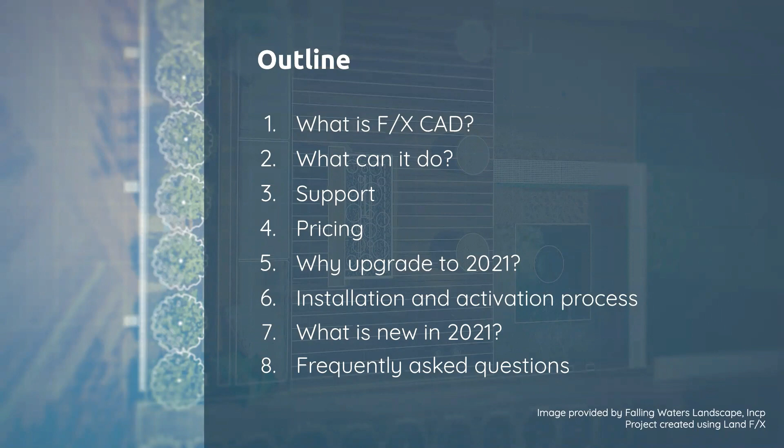So first off, what is FXCAD? FXCAD is AutoCAD. It is AutoCAD that is sold and supported by us. The purpose of FXCAD is to provide a platform for LandFX to run on without having to buy or subscribe to the full version of AutoCAD. So FXCAD does require that you have a LandFX license to run. But even though it's called FXCAD, it is a genuine AutoCAD engine that we are licensed to use.

Also, the engine is a perpetual license, which means you don't have to pay a subscription fee to keep working in it. Once you buy your version of FXCAD, that is yours to keep. It's important to note that it's a PC-only product, so if you work on Macs, you'll need to run Parallels or another virtual machine to have Windows running as well.

So what goes on in the background when we create FXCAD, or what we did with FXCAD 2021? As soon as AutoCAD 2021 was released, we started working on FXCAD. Right off the bat, we installed AutoCAD 2021 and began testing to find out what tools can work with LandFX, and so that we know the ins and outs of AutoCAD 2021. We really just dove into all those features.

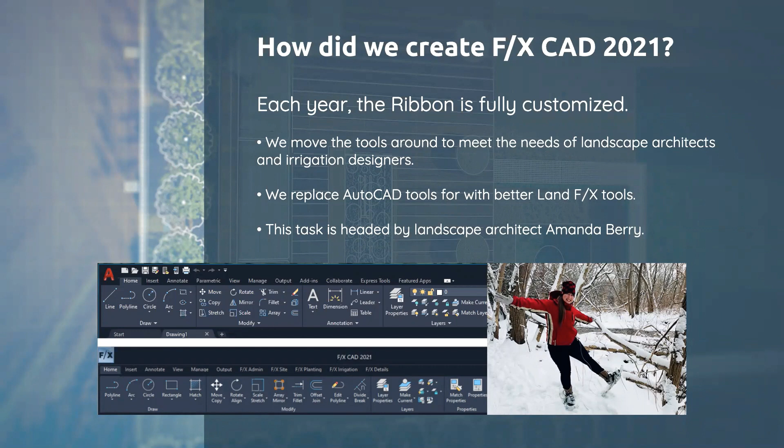Meanwhile, developers begin to alter the installer. Mike Bennett, here in the office, takes the reins for this task. Basically what he does is tweak the installation files, remove unnecessary components that come with AutoCAD, and really just optimize AutoCAD for your use.

Additionally, the branding for FXCAD begins to take shape. We come up with a new look for the imagery, and when we like the way that the branding looks, we work with development on replacing all of the AutoCAD icons, loading imagery, and splash screen.

When the branding is settled and we like the way it looks, we start building the web presence. So our web department, Kyler Groner and Forrest Williams, work on making sure that the latest FXCAD will be properly showcased and accessible on our website as soon as it is released.

And when the different components are ready, Bennett then compiles everything into an installer. This is distributed throughout the support team and everyone in the office that can be testing it so that we can be running it and finding out any issues with it. And we go through and test the software for weeks before it is released.

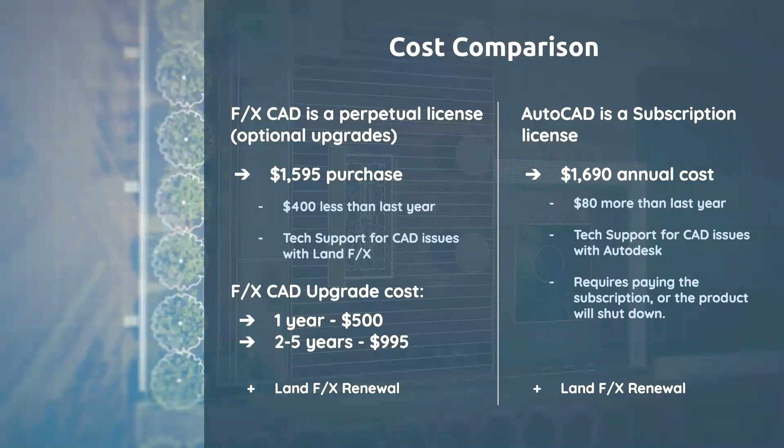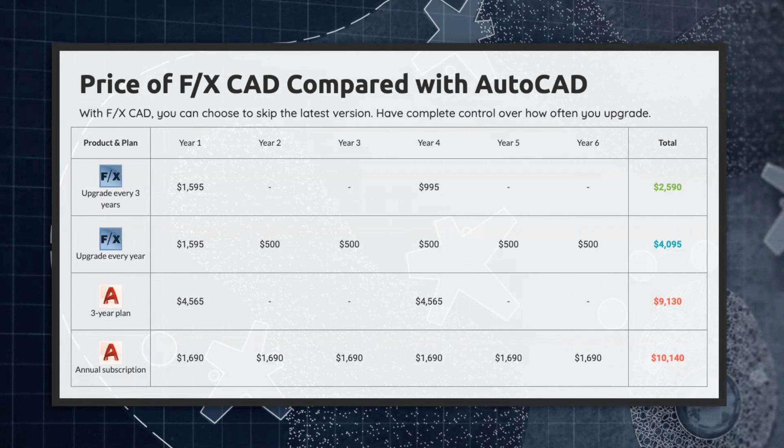So why upgrade your existing license if you're already using FXCAD and it's perpetual, so it's yours? Why would you upgrade? We recommend upgrading because every year that we release FXCAD, there are new features, and so keeping up with those new features is highly recommended.

Also, if you choose to skip a couple of years and then suddenly 3 years down the road you decide to upgrade, that's 3 years of new features you have to catch up on. So it's a lot easier to learn the software and all the new capabilities if you take it as they come out, one year at a time.

Also, file formats change, and having the latest version of your software ensures that you will be able to open up any files that are maybe given to you from consultants or anybody else. So you're keeping up with the current format and making sure that you are compatible with whatever comes your way. Also, the cost is easier to budget if you upgrade every year because it's a set cost.

It's lower than skipping years, and you can just factor that into an annual budget. And finally, if you upgrade every year, it encourages your office to keep up with computer maintenance.

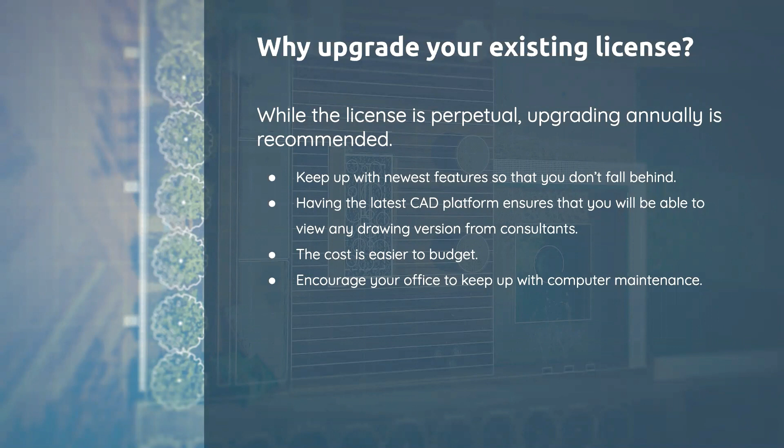So who should use FXCAD? This list was compiled because obviously there's the question of, do I need the full version of Autodesk or AutoCAD, or can I go with FXCAD? If you're a LandFX user and you plan on continuing to use LandFX long-term, FXCAD is probably great for you. More often than not, FXCAD works to fit your needs.

If you're a smaller firm or a single practitioner and you want to just reduce the cost of your CAD platform, FXCAD is great. If you don't already use LandFX, but you're used to using AutoCAD LT, the price is similar to that, and the way it works is actually very similar to AutoCAD LT anyways, but LandFX doesn't work with AutoCAD LT, so that's not an option.

Also, those that want the latest version of AutoCAD, along with the assurance that it will be completely compatible with LandFX from its release. If you've ever bought the newest version of AutoCAD, you probably know that LandFX isn't usually fully compatible with it right away. In fact, a lot of times it's released with some issues that are eventually fixed with what they used to do with service packs. So FXCAD is fully tested and ready to go from launch day.

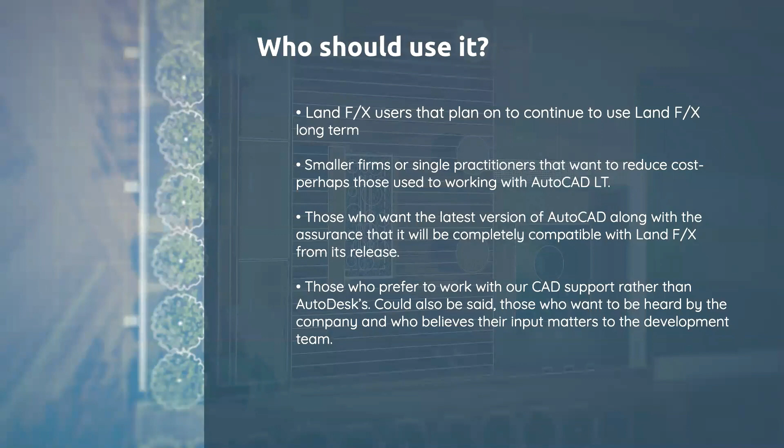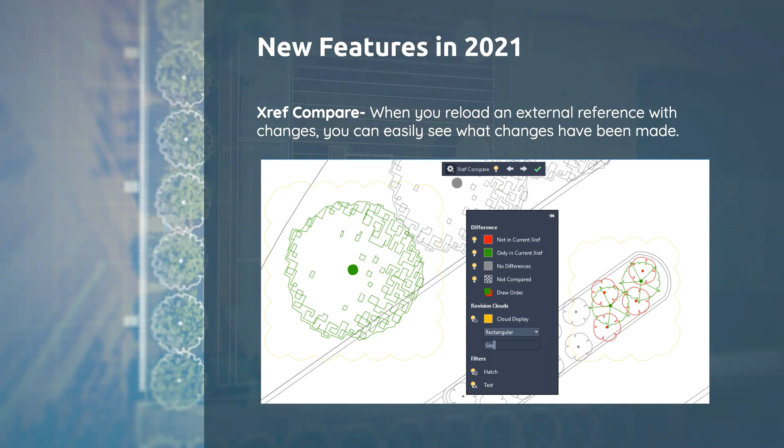So here you can see I had an XREF in a drawing. I opened the XREF and made some changes to it, and when I reloaded that XREF into my drawing, you now see that there are changes. The green symbols are new items or items that weren't there before, and the red have either been moved or deleted from the file. So if you make a lot of changes, or don't know exactly what the changes were, you can now compare what you have in your drawing compared to what you're loading back in.

Another improvement is the break at point tool. Break at point now allows you to track along a line, and while you're tracking, you can input an exact length to break the line apart.

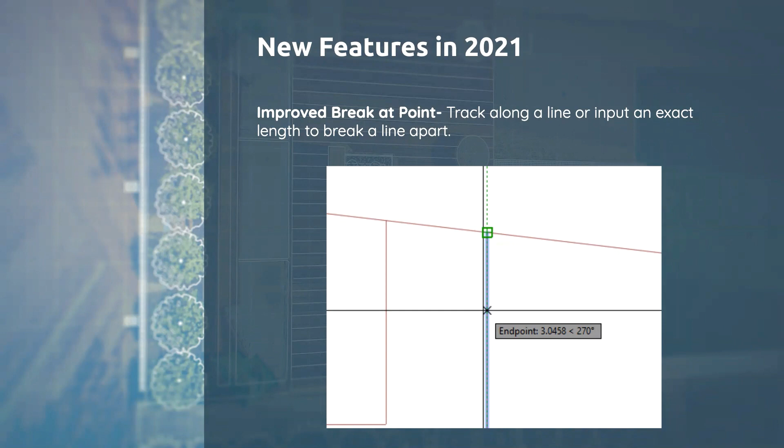The trim and extend have been improved as well. Now, when you enable the trim command, quick mode is the default setting, so you no longer have to pick your trimming edges or go through the menu to choose quick mode. You can just quickly activate the trim command and start trimming right away. Also, the crossing selection or window selection is now not the default. You can hold down your mouse and drag around and it will create a fencing line. I'll show these off here shortly.

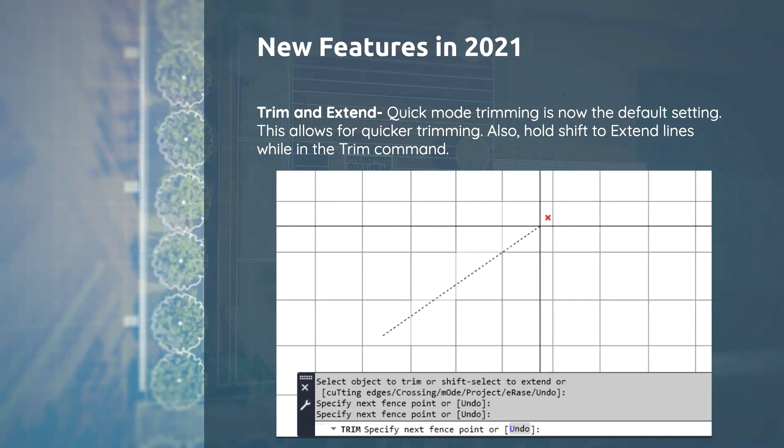Another improvement are rev clouds. Revision clouds are now their own AutoCAD object, so when you place a rev cloud in a drawing, it's not a series of connected polylines—it's a rev cloud. You can open up your properties, and after you place your rev cloud, you can actually adjust the arc length instead of having to redraw it.

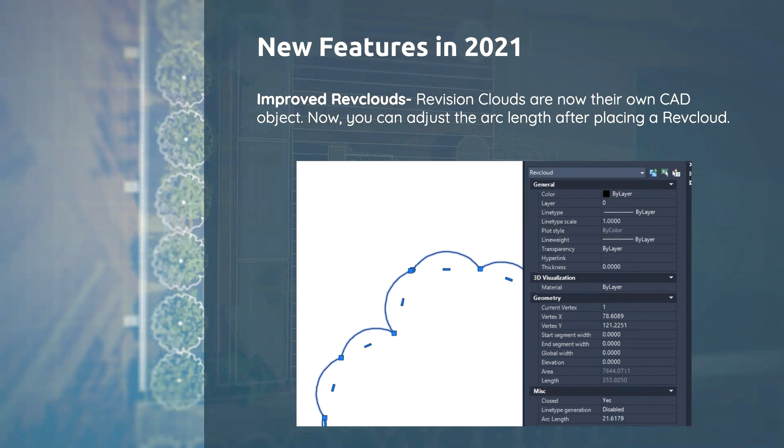And now the improved quick measure tool. Quick measure before allowed you to click within an area and see what the area and perimeter are for a boundary. But now you can hold down the shift key and add more areas as you click around, and it'll actually add up those areas and perimeters and give you a preview of what those are.

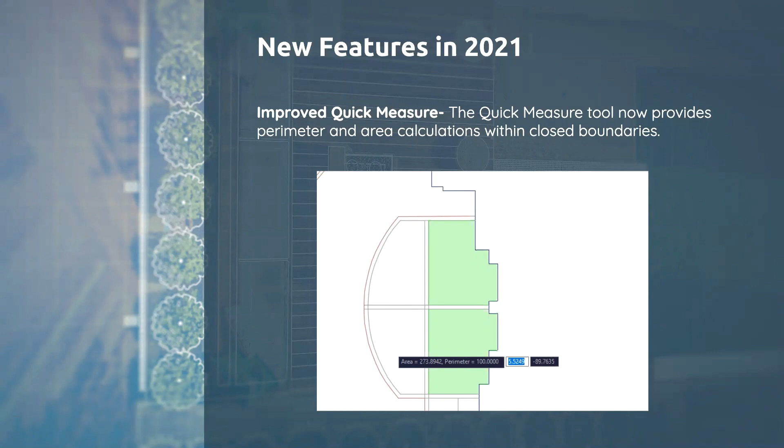And finally, we improved the ribbon customization with F/X CAD 2021. For the new AutoCAD tools that came in, we added those to the ribbon, as well as switched out some of the more basic AutoCAD tools like Lay ISO and Lay Freeze for tools like Super Lay ISO and Super Lay Freeze, which are better.

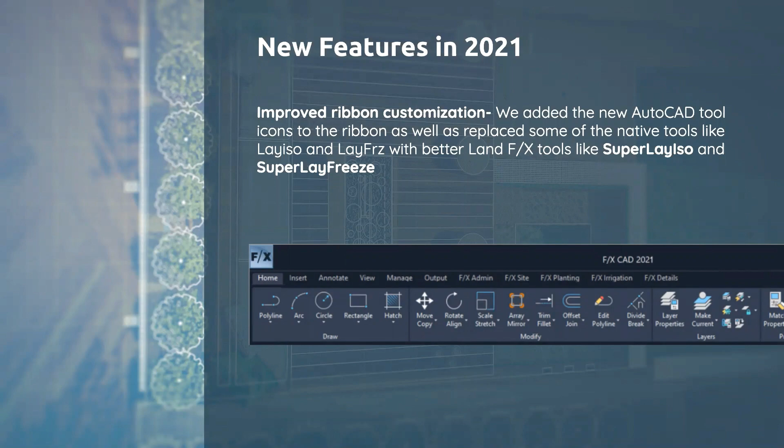So let's take a look at some of these items.

So here I am in F/X CAD 2021. Before we actually look at those new items, I kind of wanted to go through a little bit of settings and custom user interface.

One common question that we get when installing a new version of AutoCAD or F/X CAD is how do I migrate my settings over from a previous version? The AutoCAD way of doing that is to actually go into your applications here and go down to your AutoCAD version and click on the Migrate from Previous Release button.

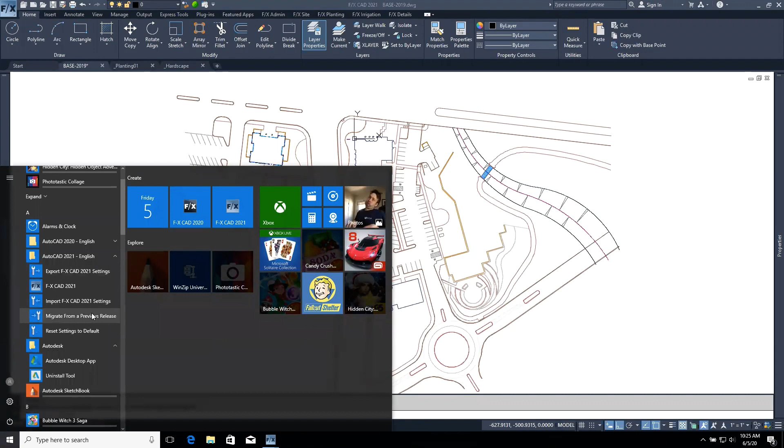And when you do that, you can select the previous release and migrate the settings over. You do have to close CAD to do that, and it takes quite a bit of time. So that's one way to do it - that's the AutoCAD method of migrating your settings.

However, we don't recommend doing this, because every year we change things. The menus change, and there are new tools and new features. If you bring in your settings, those tools or features can be overlooked, or they won't be available in your menus. So instead, we recommend, if you have a new version of CAD, especially F/X CAD, take the time to get familiar with what is available in the ribbon, the different tools that are available, and if there are certain settings that you do want to apply, do that afterwards. It usually doesn't take that much time to go through and customize these items.

Let's put this down below the ribbon.

Also, if you're used to an older version of AutoCAD, if it's a few years old, you might still be working with toolbars, and this is a thing that has been discontinued. But if you still kind of want that experience, the closest thing we have is the quick access toolbar, which is this toolbar here. You can fully customize this. So I want to show you how you can customize this, put items in it, and also how you can customize your ribbon if you do want to bring in some customization.

To do that, you're going to need to go to your Customize User Interface. There's a couple ways to get to that, but my way of doing it, because I like my keyboard shortcuts, is just to type CUI in the command line and press enter. And that brings up your Customize User Interface.

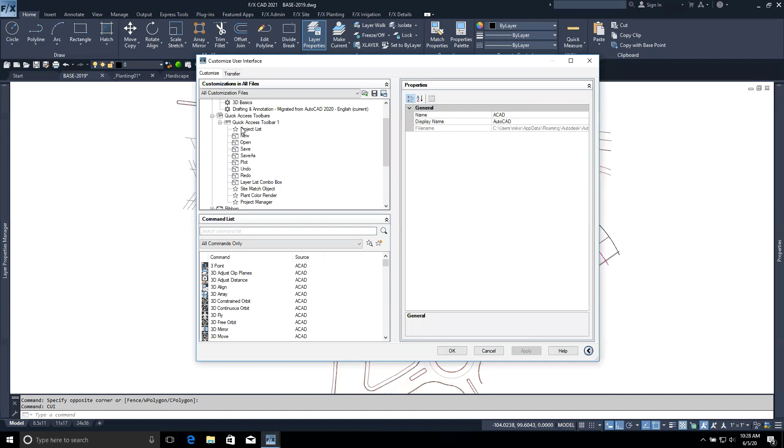The way that this works is that you have your menus here in this top window, and they're set up like folder trees. So if we look at, let's say, our quick access toolbars, which is this toolbar here, we could expand that, and it shows the different commands that are applied to it. It's ordered so that top to bottom is how it's ordered left to right in the toolbar. Currently I have customized a couple of items - I've put in just a few examples of commands here.

But if I wanted to add more commands, all you have to do is go to your command list window, which is this bottom window here. This is basically just a pool of all the different commands that are available in the product. And I can type in - say I want something from the plant ribbon - I can type in a keyword here, and it'll filter out all of the other non-related commands.

So maybe I want edit plant to be available in my quick access toolbar because I use it all the time, and for some reason I'm not in the planting ribbon when I want to use that tool. All I have to do is click on edit plant and drag it up, then place it into my quick access toolbar. I probably want it to show up on the right side of all my other tools, so I just drop it right there, and it's going to show up right up here in that quick access toolbar when I hit apply. And there it is.

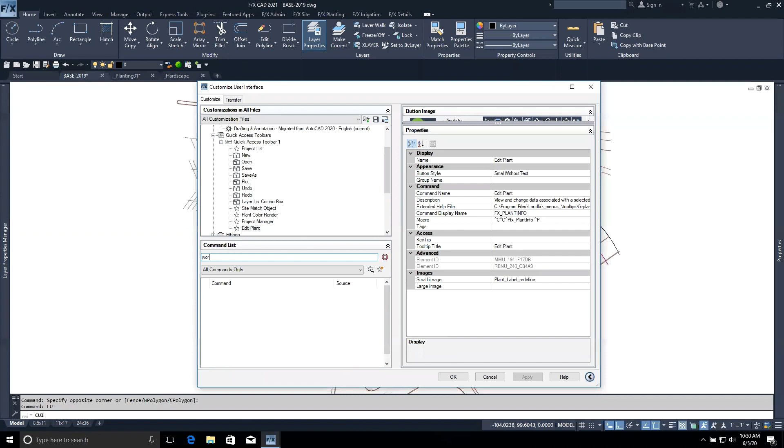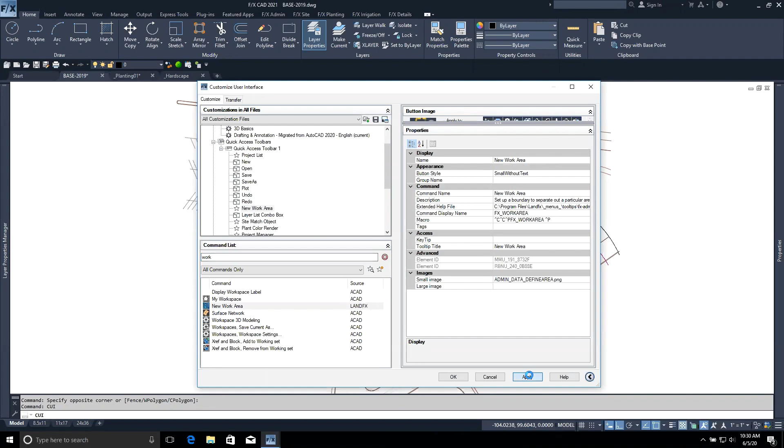And if I wanted some additional ones, maybe I wanted something from the admin tab, like maybe work area - so new work area. Also notice that under the source column, it tells you whether or not they're AutoCAD commands or LandFX commands. So if I wanted to throw in my new work area, maybe I want it right before the layer list combo box. I can drop it right there and hit apply, and it drops it in.

Alternatively, if you don't want to go through the CUI - wait for it to update - to customize my quick access toolbar, maybe I just want to go find the tools in my ribbon and apply them. I can just go into whichever one I want to use. Maybe I want to use the scale tool, and I can right click on it and choose add to quick access toolbar. So a very quick way to start adding tools to your toolbar, if that's what you want to do. And of course, if you do that, it places it on the right side.

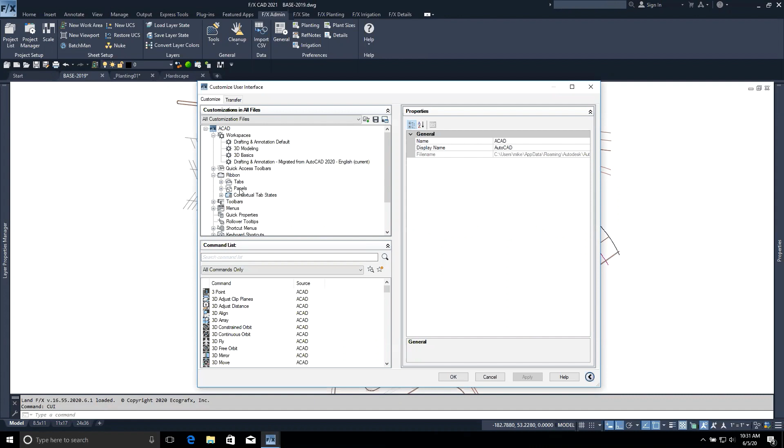And then the same process that we showed before for the CUI can be applied to customizing your ribbons. So if you open up your ribbon tabs, you get to see all the different options that are available, and you can unfold those and add commands into your ribbon as well. So still totally customizable.

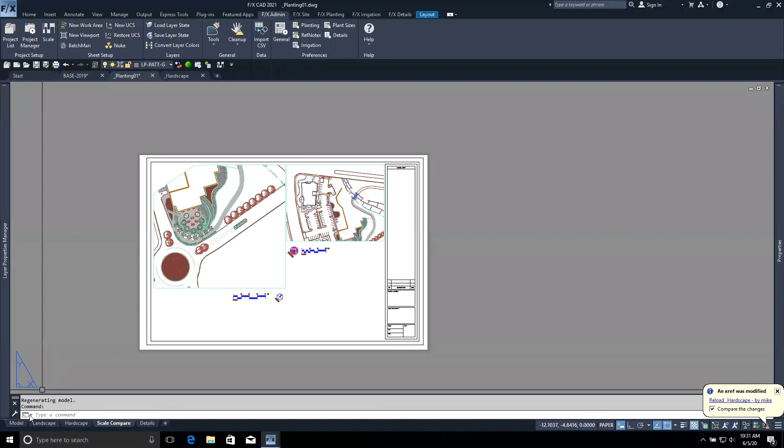All right, so let's show a couple of these new features.

First one, I want to show the XREF compare, because I think that's probably my favorite of the new features this year.

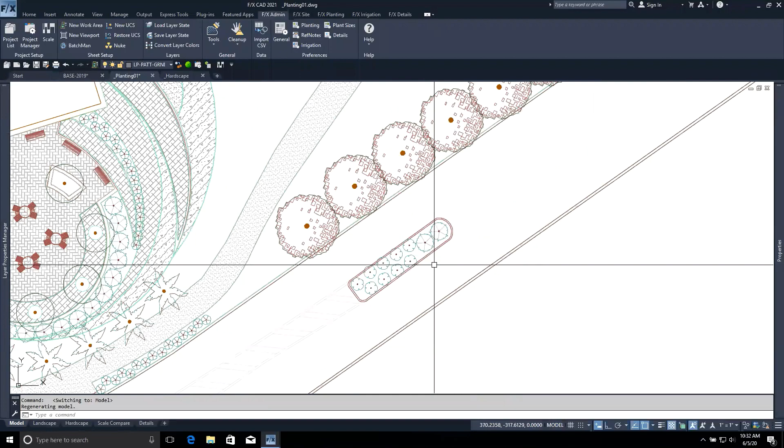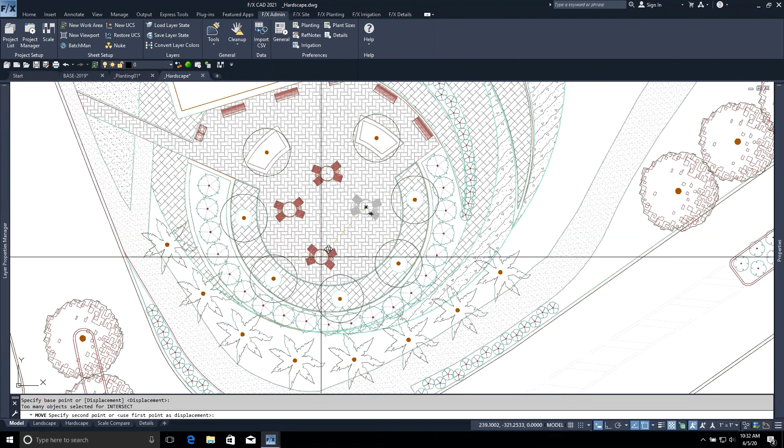Say you're working on the planting plan, and someone makes changes to the hardscape, and you want to know what those changes are in case it affects how your planting plan is going to look. So if someone were to go in, maybe delete a table, move this around, take out a bench, maybe put some more receptacles on the path here. Not a very good design, but changes are made. And you want to quickly know what those changes are when you get that file back, so you can be working on your planting plan with the most updated version, and be aware of what changes were made.

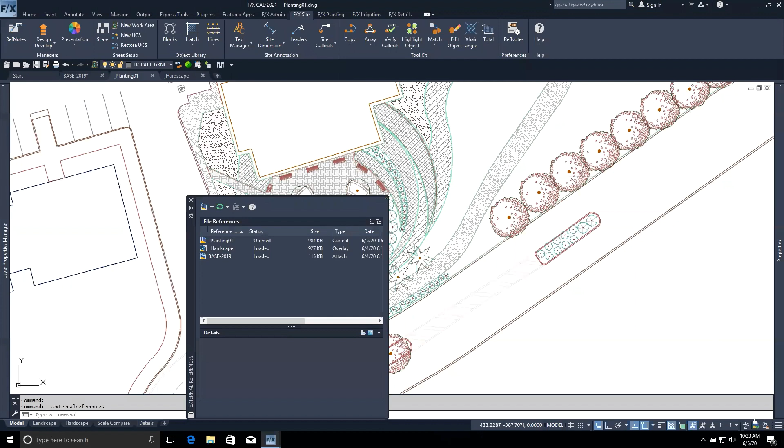So that drawing is saved. And I should be getting a message here, I think, because I closed it already. Let's try it.

All right, so I make changes, just the table this time, and I save. And now when you get this notification that the XREF was modified, you click reload. You can check the option to compare changes, and it's going to bring up the drawing compare window.

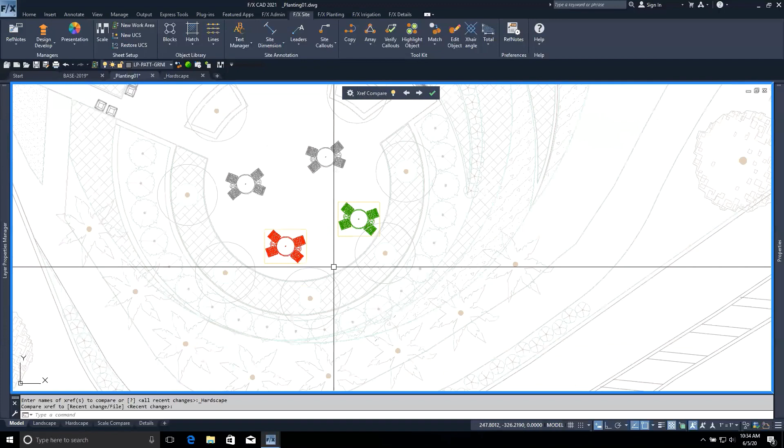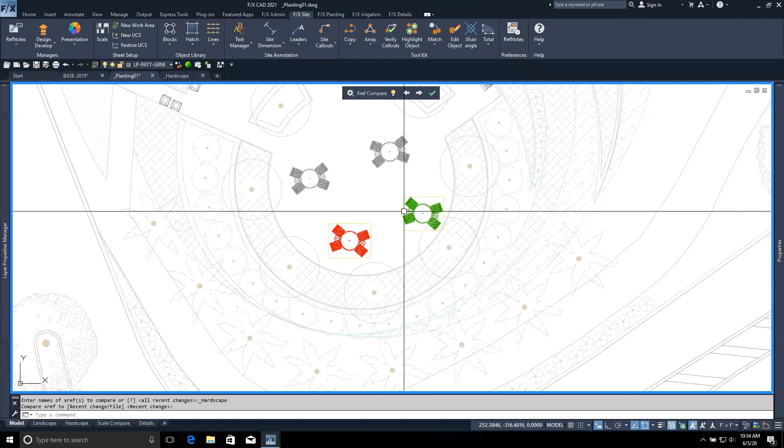So you can see that the table that I just moved used to be here in red. That's where it was removed or moved from, and it's been moved over here, the green segment. Cool. Yeah, so the green shows where a new addition is, or where something has moved to, versus where it was taken away from or deleted.

Additionally, you can open up these settings for this, and say it gets really complicated, you can toggle. Let's move this out of the way by clicking on the top here and dragging it. You can toggle on and off the visibility of these items. So maybe you just want to see the additions or where things are moved, and not necessarily where they're deleted from. You can toggle that off.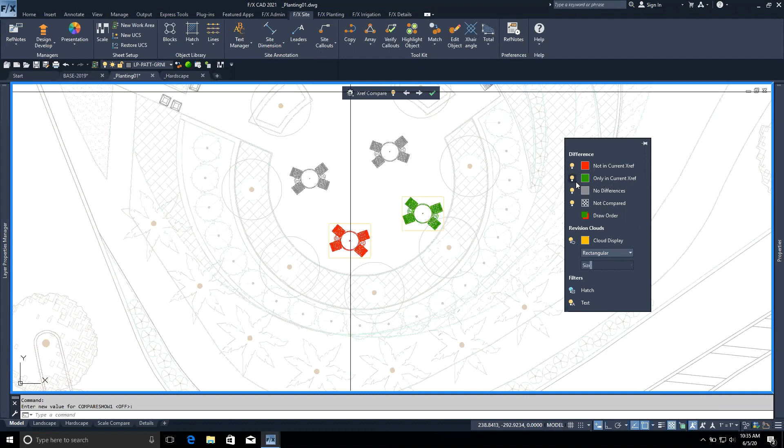Or if you want to just see what was removed, you can turn off the new items here. You can toggle off the parts of that same XREF that haven't been altered whatsoever. That's what's in gray, so if you just want to see the changes.

And then of course, if you want to hide anything that's not being compared. And then if things are on top of each other, so if I didn't like the draw order, I could adjust the draw order between what's taken away and what's new.

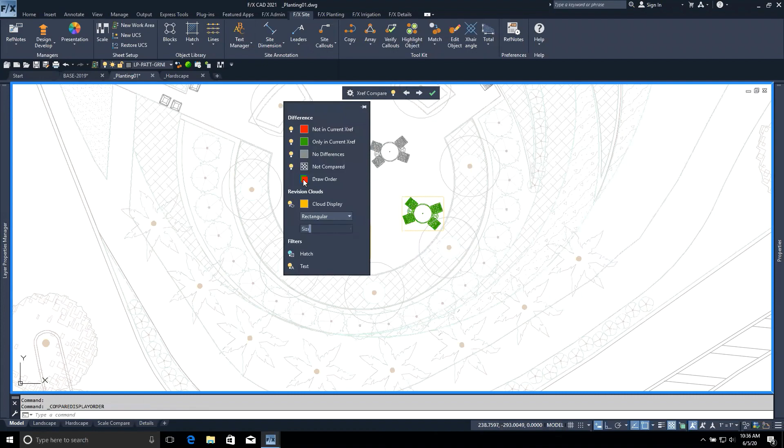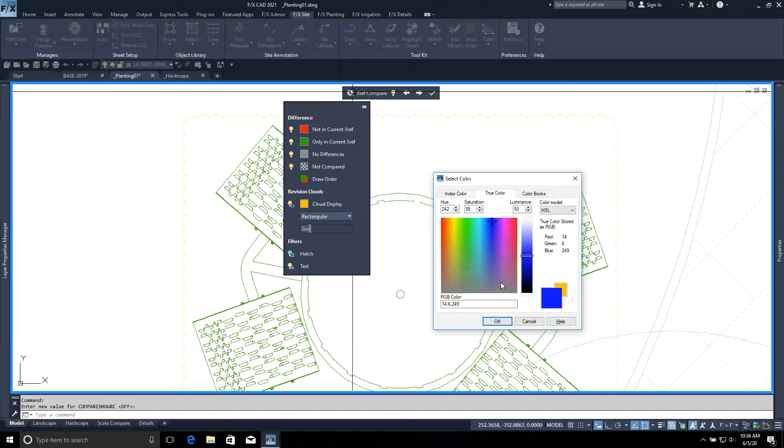Additionally, and it's easier to see if I zoom in, around each of these new items there is a rev cloud. And so if I want to take off the rev cloud, maybe it's distracting, I can hide that. I can change the color of the rev cloud that points it out. Maybe I want a blue, and it'll update those.

And when I have other XREFs to compare later on, like if I reload this after making more changes, the rev cloud display will remain. And of course, you can adjust the size just to make it a lot easier to see.

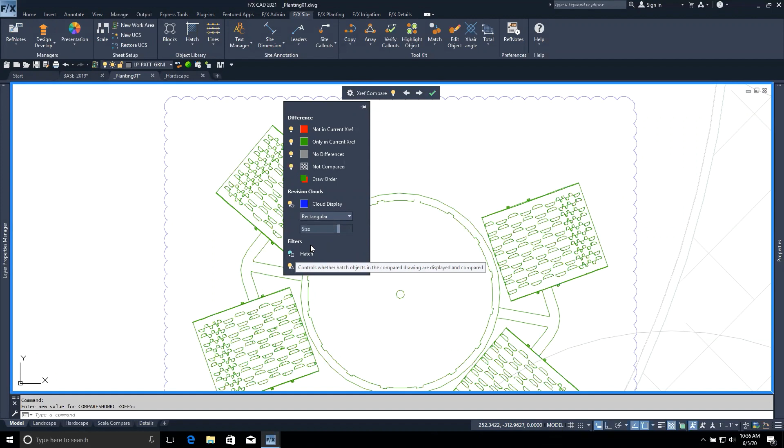You can also turn off hatches in the compare drawing if it's too cluttered with all these different hatch patterns, or if maybe you have a lot of labels and text that are getting in the way and making it hard to see what you're working with, you can toggle those off and on as well.

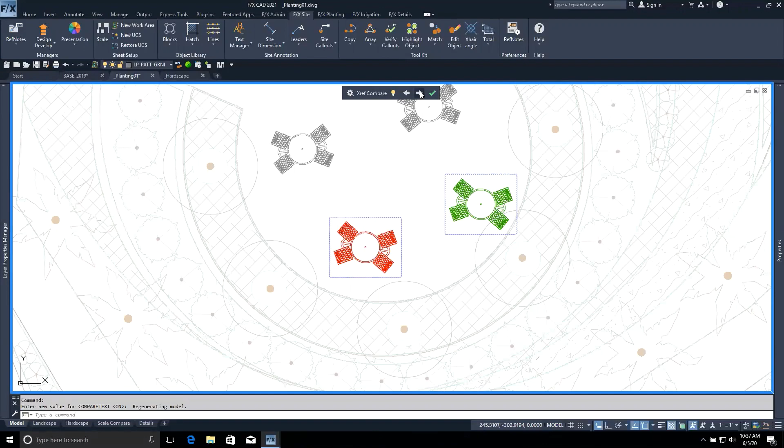So once you're done comparing it, maybe if you want to keep track of this, you take screenshots of changes or take mental notes. Additionally, you can toggle between the changes with the arrows. But once you're done, click the green check mark, and it's going to reload that XREF.

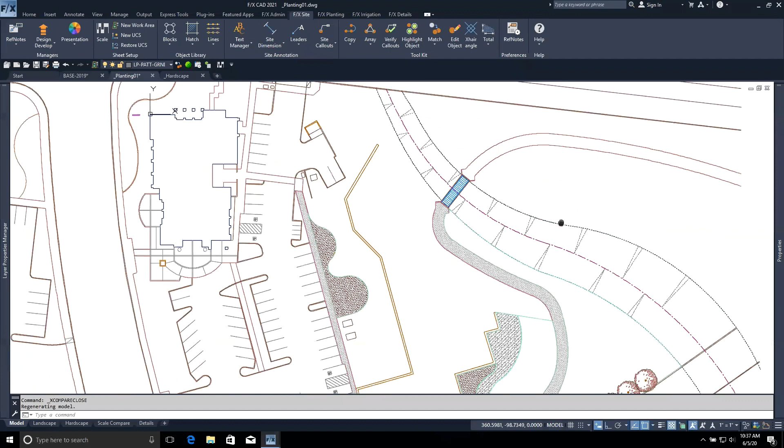So really cool feature, jumping off the feature from last year, which is DWG compare, which is very similar, but not with XREFs. So let's look at the new trim.

Well, and on that, so you're saying it's just kind of a visual comparing thing. Lou just asked in the chat, is there any way to print that comparison? I guess it's just a visual thing, because it would be kind of nice to be able to print that in color, wouldn't it? Yeah, my thoughts on that are taking a screenshot and keeping those, and if you needed to print it out, have that available. Maybe they'll add a print with color option with 2022. It seems like that would be a logical next step for that feature.

I was looking around for a way to maybe save, whether it's an image or a previous version, so you can kind of see what changes over time, but didn't see that working. I think for now, I'd recommend using your screen capture tool. Exactly. And also, the original drawing compare that first came out last year, they've really been improving on it. And obviously it's just yet another reason to stay with latest, because you get these cool new features and they do get improved each year. Correct.

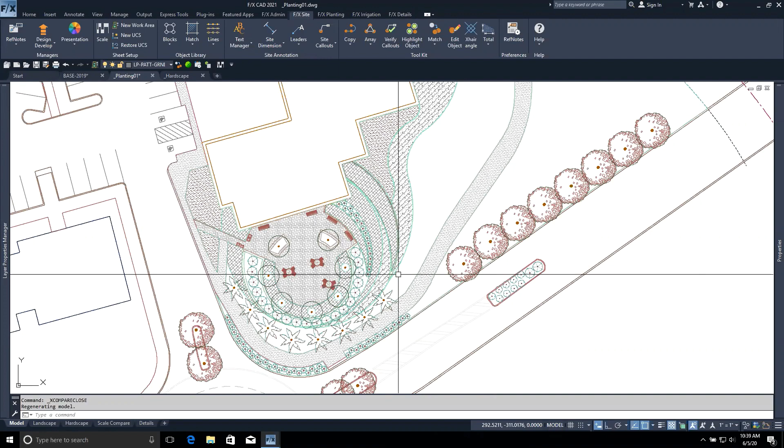In addition to that, let's show the trim command real quick. You can find trim in Home, or there's a trim button in the ribbon. What I like to do is just type in trim, because no matter what changes come to the ribbon or menus in the future, typing trim will always activate that command. That's why I like memorizing keyboard shortcuts—menus change, toolbars aren't there anymore, but I can always rely on those shortcuts for basic AutoCAD commands.

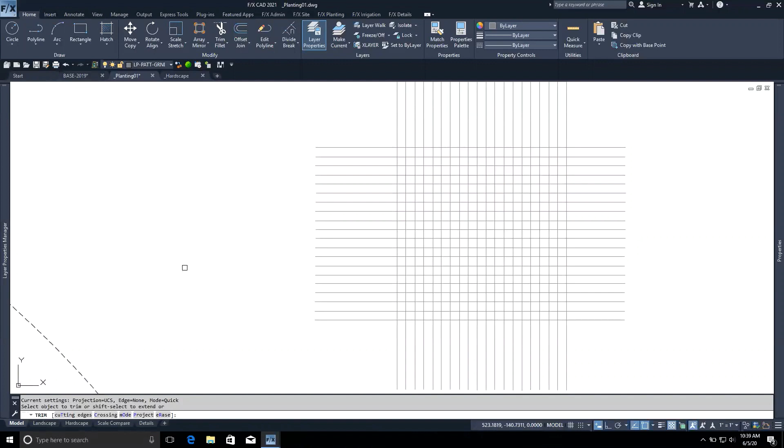So type in trim. Now it kind of looks like before where you select items, but I don't have to select my cutting edge anymore. I can simply just start clicking on lines, and it recognizes all other lines as trimming edges, so I can very quickly start trimming.

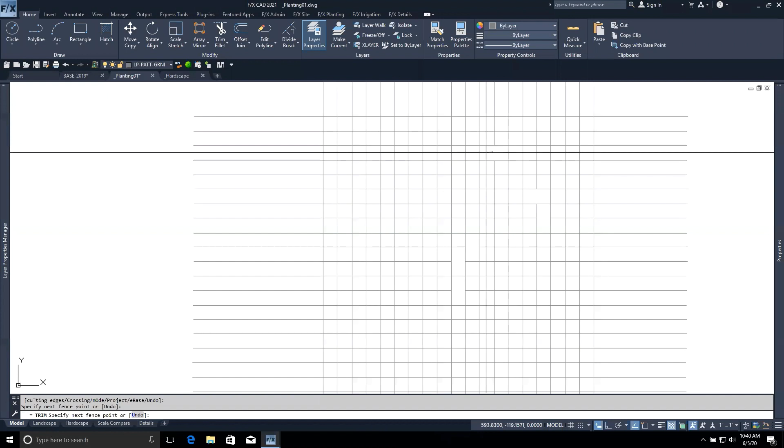Additionally, now if I hold down my mouse, it enables the fencing option. So I can draw my fence, and basically anything that this fence line touches gets trimmed.

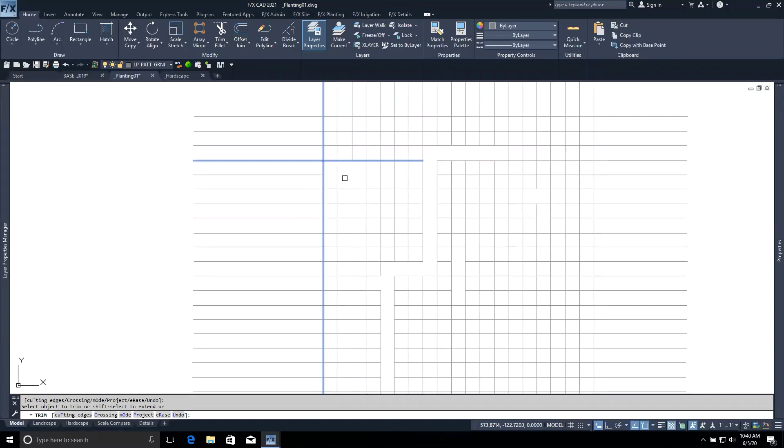If you want to revert to how it used to be—choosing your cutting edges or the crossing mode—you can still do that. Type T down here, and now you can choose your trimming edges just like before, then select your items to trim. If you want to go back to windowed selection or crossing mode, type C and enter, and now you draw your selection windows.

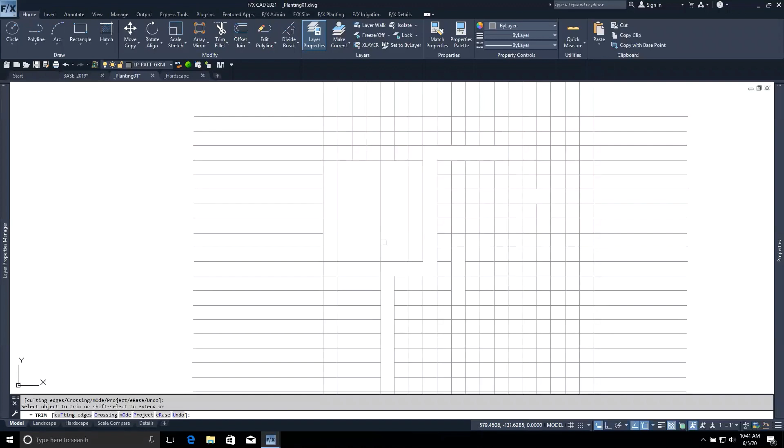Another one: you can now activate the extend command while in the middle of trimming. So let's say I've trimmed that line, and now I want to extend this line up—I just hold down the shift key, and if I click on that, it auto extends while in the middle of the trim. So you don't have to go back between extend and trim if you're altering a bunch of line work. Really neat, makes it a lot faster to do these kind of actions in this current setup.

Let's look at another new feature in this drawing: the break at point tool, available here in the ribbon under the divide break drop-down menu. Break at point has been improved, so now you can track along lines and break at specific lengths.

To use this though, you do have to set some things up that might not be default settings. Down here, you need to have object snap tracking on. If you don't see it in this little menu, open up the hamburger menu and check object snap tracking, then make sure it's on. Also, with your snap settings, make sure that extension is selected.

Once you do that, you can break at point by first selecting a line and then hovering your mouse over one of the snap points, like this endpoint here. It's subtle—let's do it again. There's a slight change in how the cursor looks, right? That small change from the pick box look to now tracking allows you to drag your mouse, and even though my mouse is going away from it a little, it's still basically snapping to that track. I can just click anywhere to break the line at that point.

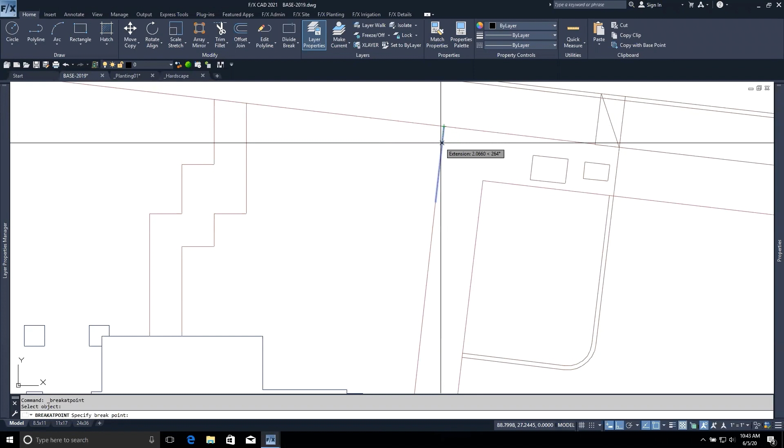But I can also, while in the middle of that tracking, just type in a length, say 1.5 feet, and it gave me a precise breakpoint at 1.5 feet from where I started tracking. So more accuracy with the break at point tool—pretty neat.

Now also rev clouds have been enhanced. If you want to draw a revision cloud, just type rev cloud in the command line, press enter, and just like before, you can specify the arc length and all these different options before you start drawing. Then I just draw my revision cloud.

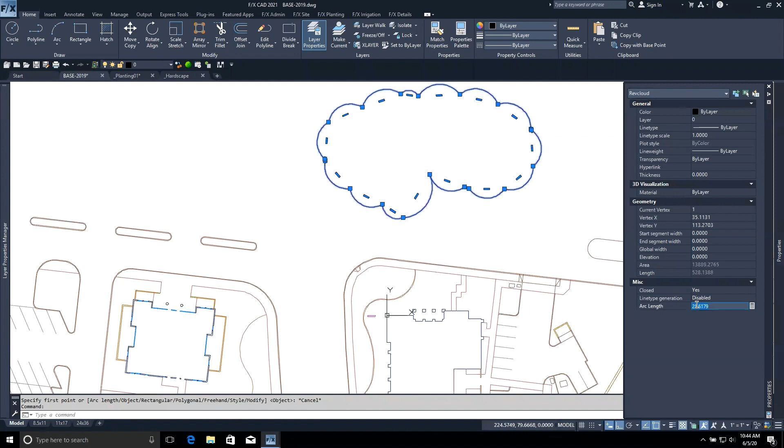The new feature is that it now shows up in properties as a rev cloud item—it's no longer a polyline. So if I want to change the arc length on my revision cloud, I can change that and hit enter, and it changes all of those arc lengths automatically. Before, you had to redraw the entire rev cloud.

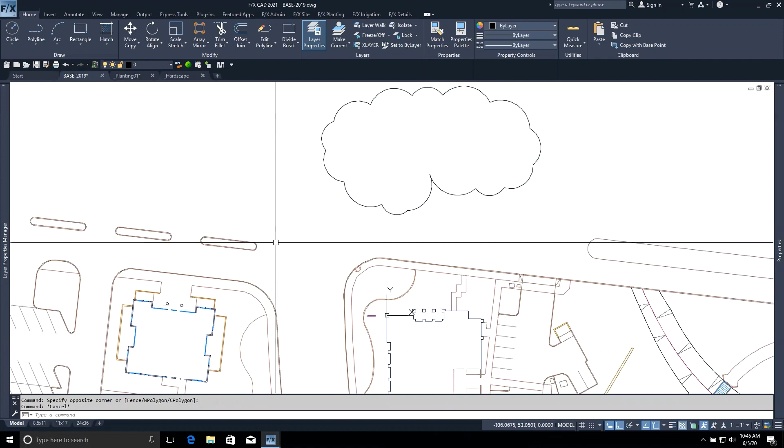So I think those are most of the features I wanted to show. Additionally, as I said before, we have various tools that are AutoCAD tools we've replaced with better Land F/X ones.

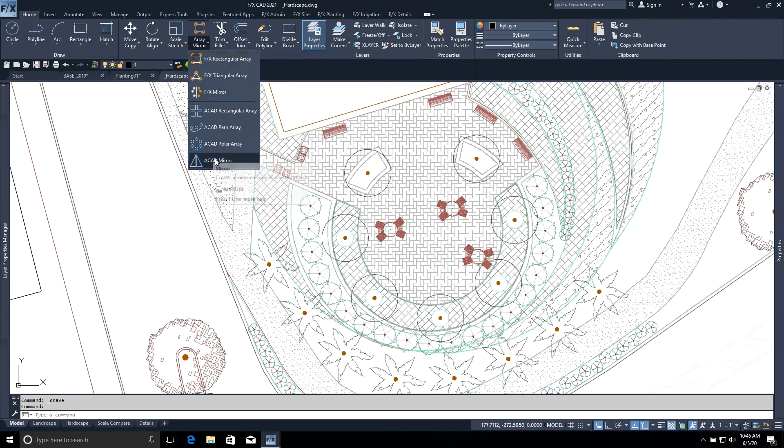If you open up your mirror dropdown, we have our FX Mirror, which is a way to mirror objects that have LandFX data without destroying the data or making it not work properly, as can happen if you use the AutoCAD mirror command. Though we do include both options here if you prefer one over the other.

Same with move copy - we've got our XCopy and XCORO commands. Again, those are tools that allow you to copy and rotate items that have LandFX data, so it doesn't break the data as you use those tools.

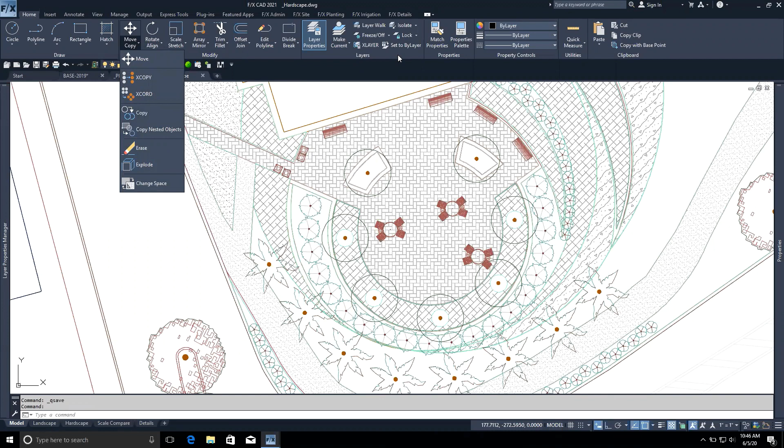So I definitely recommend you go through these. One more that I haven't shown yet is the improvements to the quick measure. I knew there was one more. The quick measure tool is located in the home tab here in the ribbon.

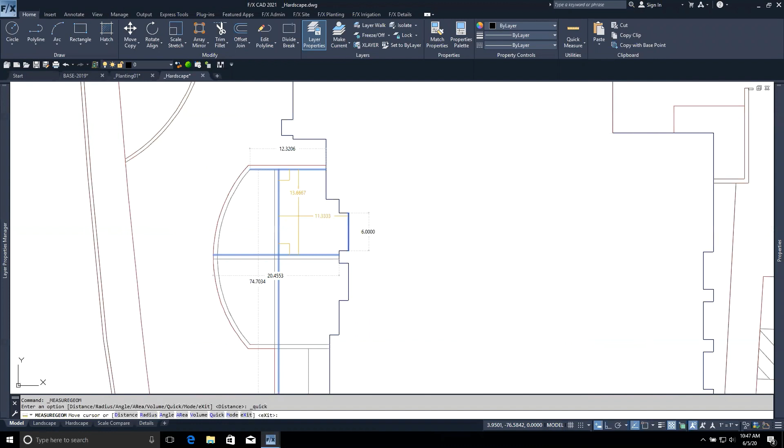This is neat. Oh, my mouse is really jumping around, let me see if I can fix that. So basically where I point my mouse, if it's in an enclosed area, it gives me the measurements of the X and Y length within, so you can quickly measure an area or lengths to a closed area. Before, you could click in the area and it shows you very quickly what the area and perimeter are for that closed boundary.

But the new addition is now you can hold down the Shift key and click - hold down the Shift key. There we go. And while holding the Shift key, you can click in other areas and it adds those areas and the perimeter to those measurements. So now if I had multiple areas that I wanted to quickly see the area for, I could use this and just very quickly see that.

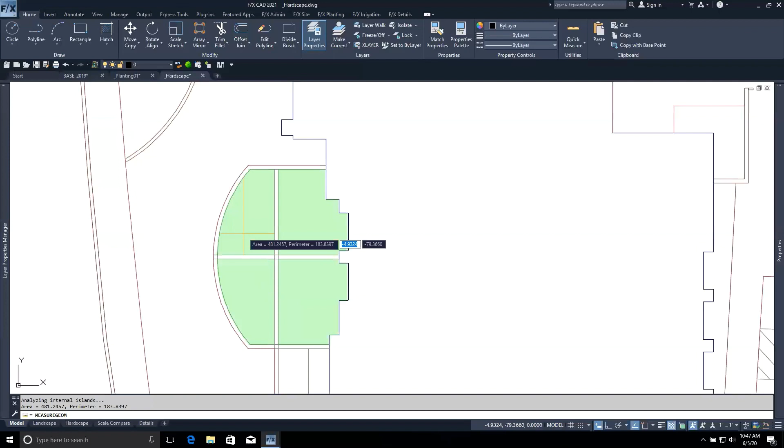So let's go back to here and take a look at some of the frequently asked questions. Maybe we can knock off some of those questions coming in.

So let's go through some of these questions. One that we get, and one I already did cover, but let's do it again: Can I use FXCAD without LandFX? No, it is required that you have a LandFX license, whether that's Planting F/X, Design F/X, or Irrigation F/X, to run FXCAD.

That's really the only way we can offer FXCAD for the price that it is, and the purpose of it is to be running your LandFX licenses. Does FXCAD include a LandFX license? That's a good one - no, it is still, just like with AutoCAD, a separate item. It's the platform for running your LandFX licenses, so FXCAD does not include any of the planting, design, or irrigation licenses.

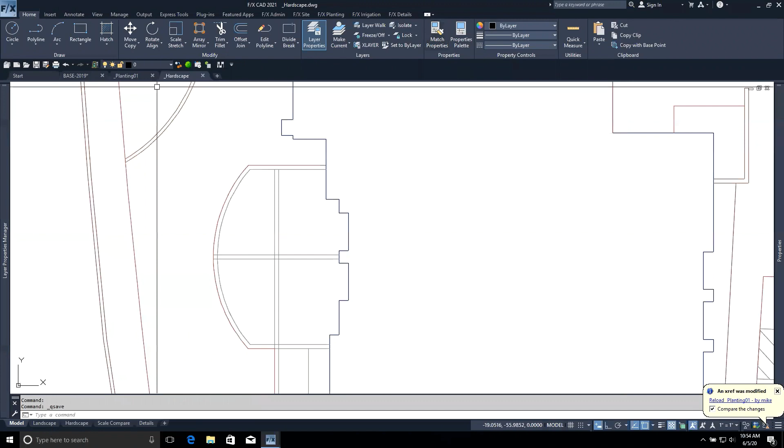Let's say I make changes to my planting plan - take that tree, maybe move this palm over here for some reason, and I save it, and I close it.

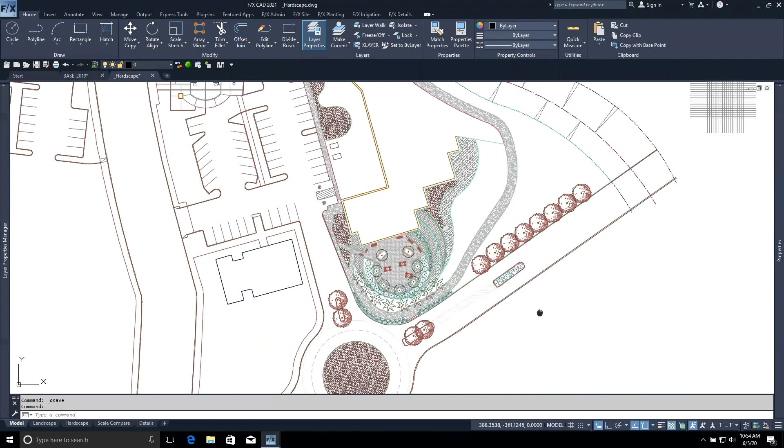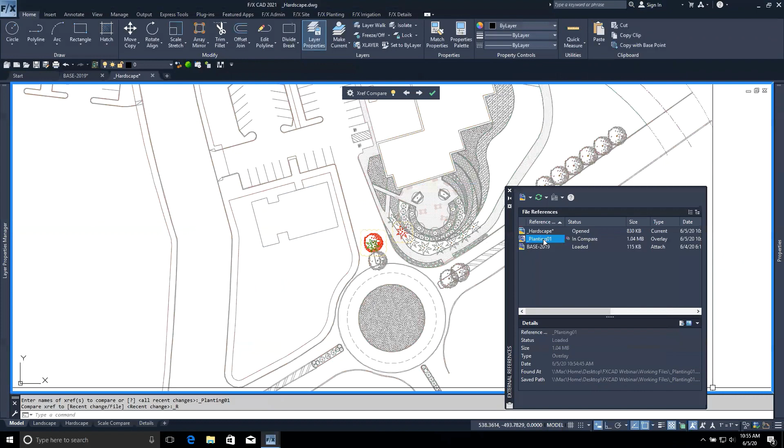You should be able to just go to the XREF manager to reload it - needs reloading - compare. There we go. So that's another way you can get to the compare box, by right-clicking on that in the XREF manager. So the drawing is closed, and the previous version of that XREF is still saved in there, so you can compare even after the drawing is closed.

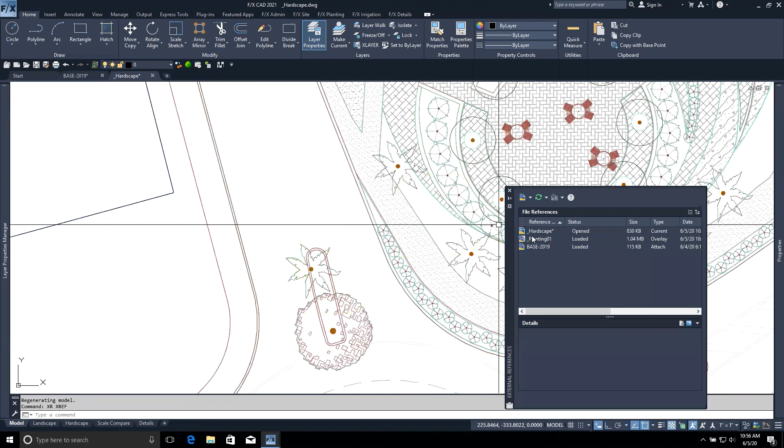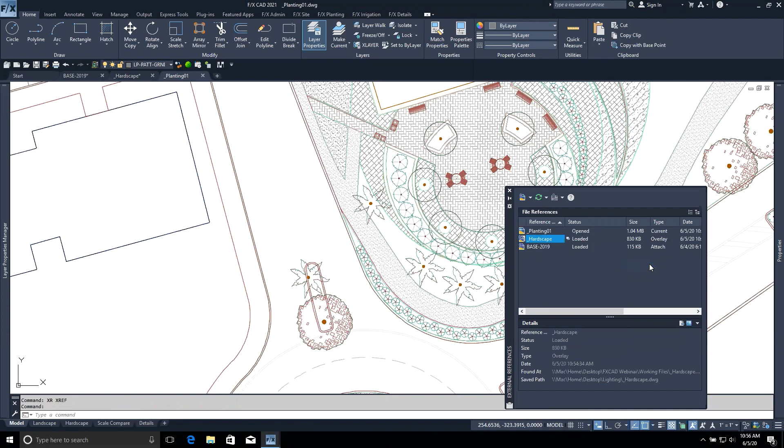It definitely is the hallmark feature of this version, and it can understandably be a little frustrating, I suppose, that each version of AutoCAD seems to have maybe one cool new feature. Agreed, but that's the beauty of how this perpetual license works with the low upgrade cost - you don't jump 5 versions of CAD and have to deal with a whole bunch of new things. You upgrade every year or every other year, and you just have a little bit to deal with, so it's a lot easier impact on you. Just always keeping your computers up to date and your software running is a better way to do things. I think we've all fallen into that habit of having your favorite version of some software that gets to be 7, 8, 9 years old, and everybody else in the office is making fun of you because you have the old version. It really is better to just stay current - you don't have to be the exact current version, but within a year or two is obviously a more responsible, better place to be.

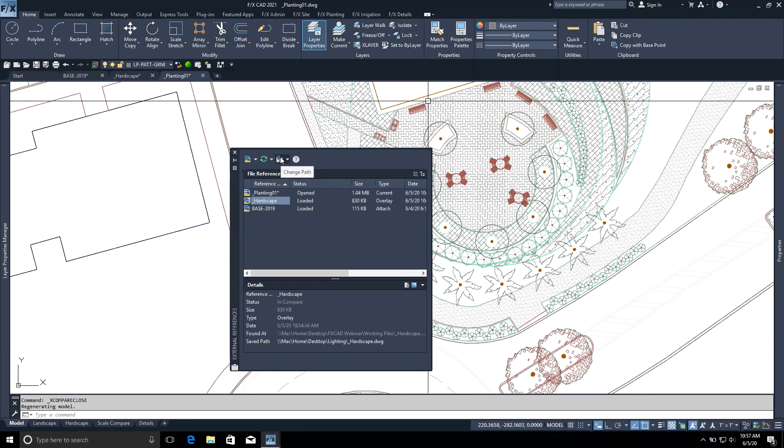And one thing you didn't mention that I wanted to add - another really great reason to go with F/X CAD is, obviously this is what we use to shoot all our videos, like this webinar. So when we say click this button, you're looking at the exact same interface, as opposed to if you have AutoCAD and who knows how your ribbon or toolbars are configured. So it's just a teeny bit harder to follow one of our power tip videos or webinar. To get real maximum benefit from all our training resources and videos, I think that's definitely a good reason to go with it.